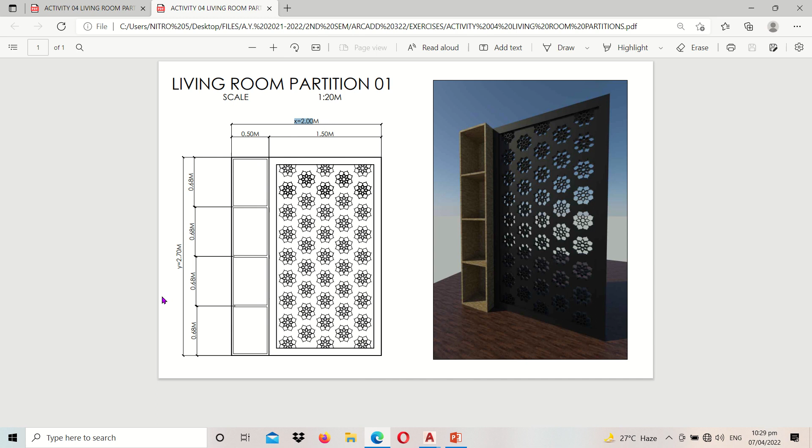So the first one here, we have 2 meters for X, which we will keep uniform for that. We have 2.7 for Y, same, we'll keep it uniform. But when it comes to the overall design, I encourage you to do your own.

There are a lot of wonderful and interesting ideas you can have for this project. But what I did with mine is I took the 0.50 here on the left side and created shelves. And on the right side, I have the metal cutouts that will serve as ornamental so the design won't be that boring. And there is fluidity within the given design.

And then the other one, this one here, I have a little minimalistic as compared to the first one. Same, X is 2, Y is 2.7, so we kept it uniform on both X and Y. But when it comes to design, of course, you don't have to necessarily copy mine. The intention of this one is to provide a living room partition, so I have here an abstract form of a phoenix.

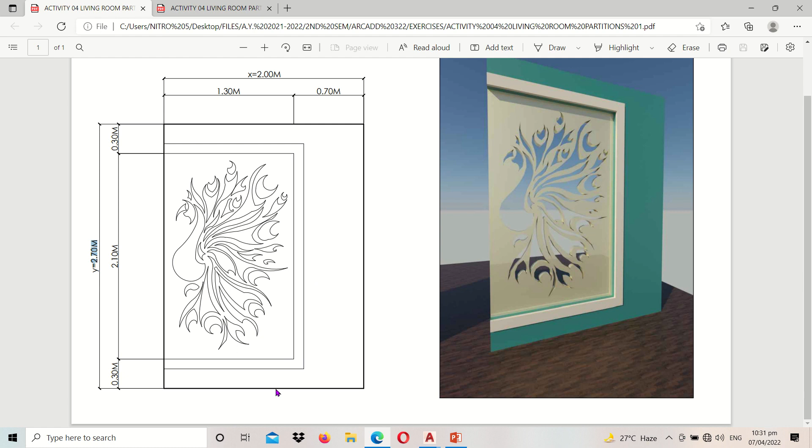And then for this one, I have a dry wall, not CHB wall, just dry wall. Then we're going to cut the phoenix out.

So let's go with cut file. There you go, so these are the shelves I mentioned earlier, and these are also the cutouts. These are actually botanical mandalas, and they have a bit of a Moorish or Islamic feel to them.

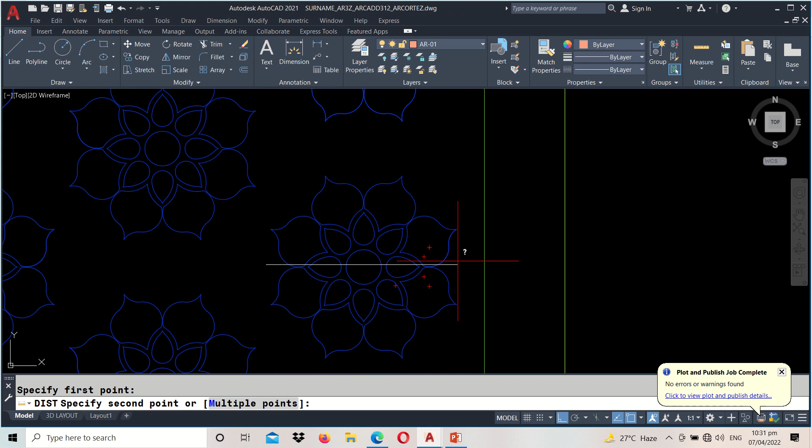Let's try doing this one since some of you forgot how to do this. So I have somehow around 25 centimeters, or that's around 10 inches. So let's create first a circle that will serve as a reference.

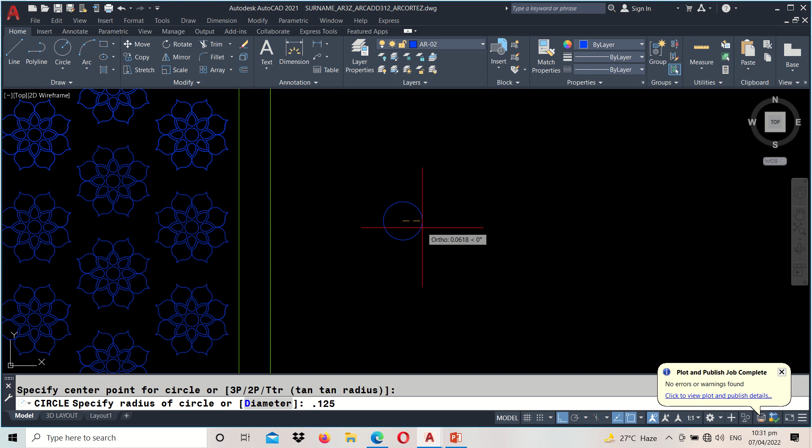There you go, let me just zoom in. I'll enter, just have to pick from the center. Make sure OSNAP is on. You pick the center, you pick a quadrant, then enter, and I have a circle on the center.

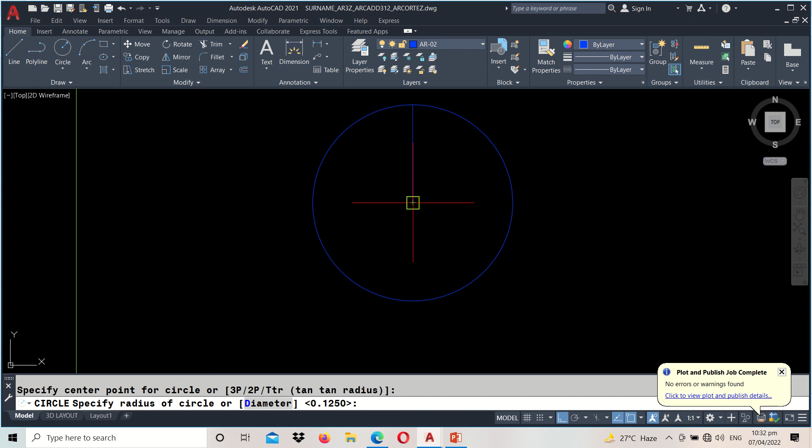So let's try circle, enter, picking from here, click. And I'll just be picking another one to assume the radius. Click, and let's zoom in.

This time I will be using arc, enter. I'll just hover my cursor going here. My ortho or my object snap tracking is on, so I'll just hover somewhere here.

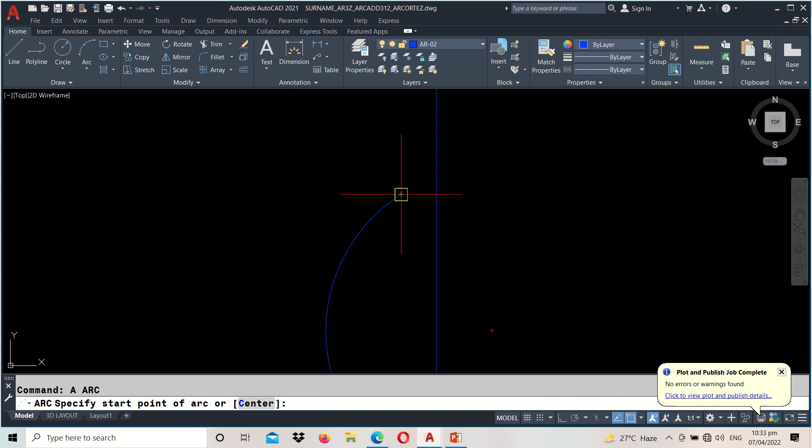And I have to turn off ortho because it's better to modify or make an arc if ortho is off. Anyway, I just pick my point 1, this is point 2 and point 3. And A, enter, just pick 1, 2, and it's okay if it goes beyond.

Because we can always make the necessary modifications that you want with this, so I'm good with that. I'll just have to trim this, and I just have to move this one. I'll be using it later.

Let's do mirror, MI, select 1 and 2, enter. We pick your first mirror line, first point 1, and second point. Click, enter. So that is to create a reverse copy.

Now I have these 4 arc segments, but preferably if you want to make a cutout in 3D, you have to extrude a closed 2D object. This is not a closed 2D object, so the solution for that is boundary.

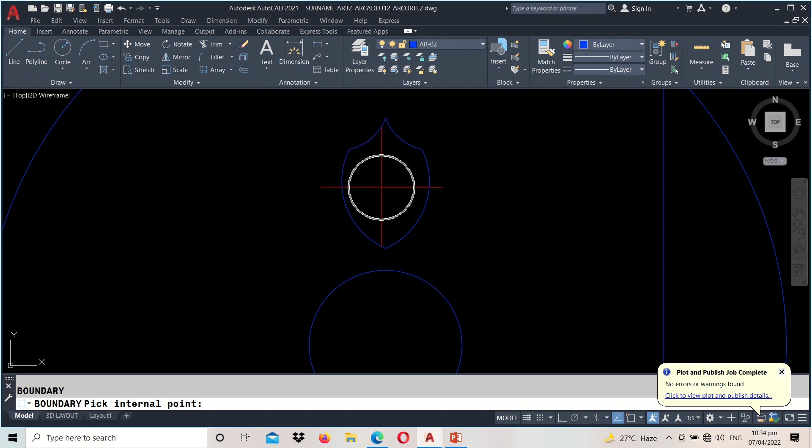Shortcut is BO, then press enter. You click this pick points button here, click, and you click inside. Make sure all of the snaps have snapped together, with no open part of the object. Press enter, there you go, so it's now whole, a single entity.

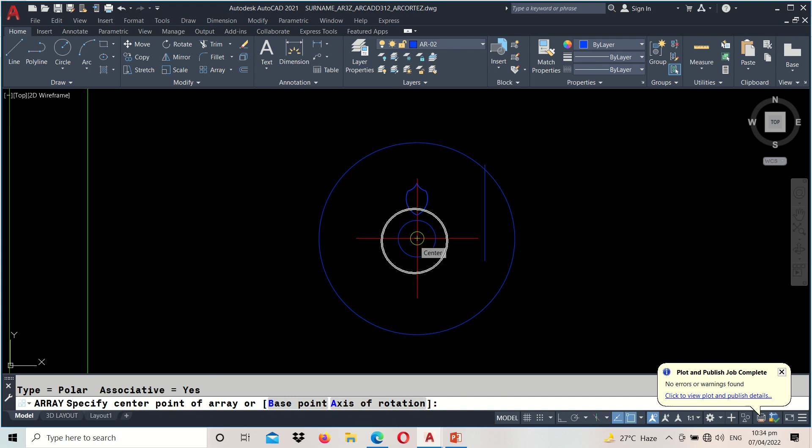And now we're good to array. That's AR enter, select this, enter. Specify array type, that's polar. Click, you click on the center, and there you go. I need 8, so you click this, 8, enter, and click close array.

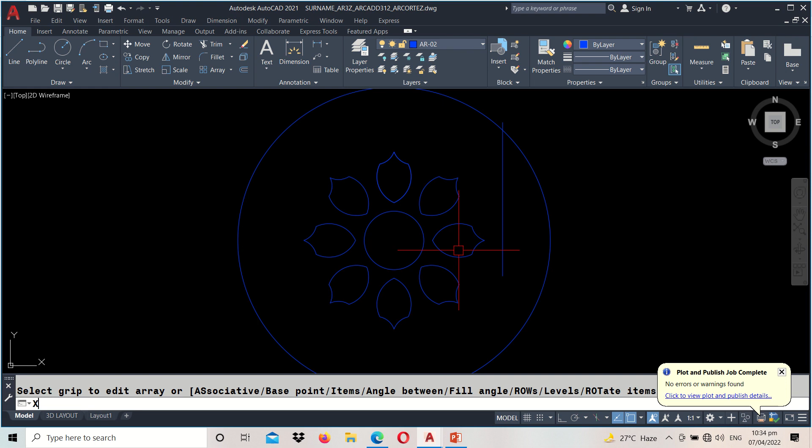Once you're done with this, as you can see, if I select it, since we arrayed it 8 times, it's one whole object, so chances are it might not get extruded. So might as well, we have to explode, X, enter, select object, let's select this, enter. There you go, they're converted into individual closed entity objects. We're good with that.

Now let's move this one back at the center. There you go, let's rotate it, RO, select, enter. I'll be picking from here. I'll just make an assumption, centering it there, I'll be using it for the bigger part of the mandala. So click, make sure ortho is off.

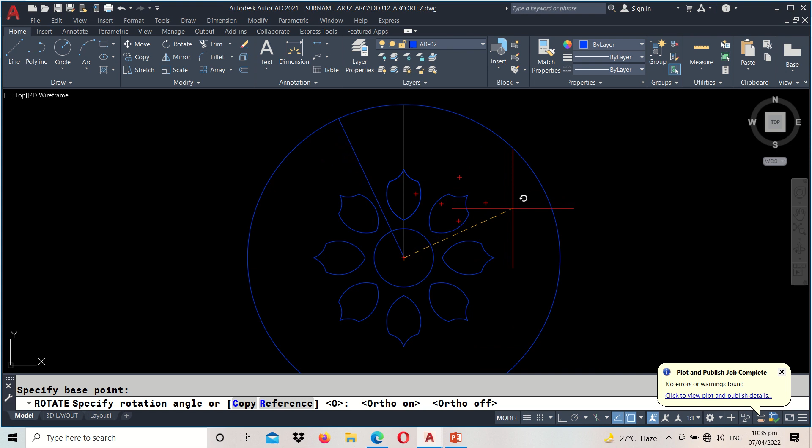Because if ortho is on, you can't rotate it to center properly since it's limited to 90 degrees. So I'll be turning ortho off. And I'm not sure exactly how many degrees it should be, maybe 22 or 23, but I'll just make an assumption like this. So I'm good with that.

Click A, enter, so this is 1, 2, 3. A, enter, 1, 2, and 3. You can make the necessary modification for this. Something like that, probably.

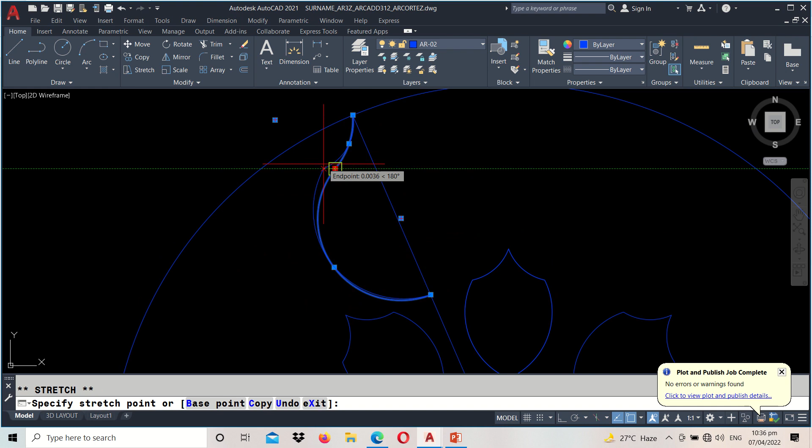Okay, now we're good to mirror. Select... sorry, I just have to make it a little curvier. There you go, so that's the mirror command.

Specify first point, I'll be picking from the endpoint here, going up to the top. Click, enter, select this, enter.

So once that's okay, we can now do a boundary. Enter, click the pick points option, and pick at the center. There you go.

This is it, because you cannot extrude something like this directly. You can extrude it, but the problem is you cannot cut it out from a given volume. That's why I created a single entity closed object.

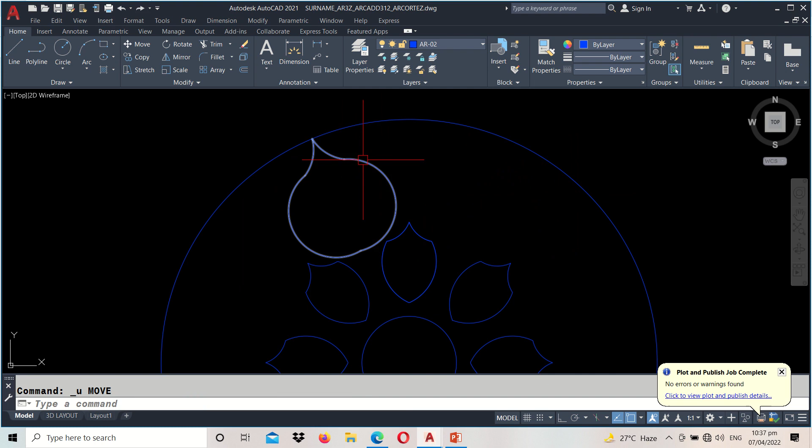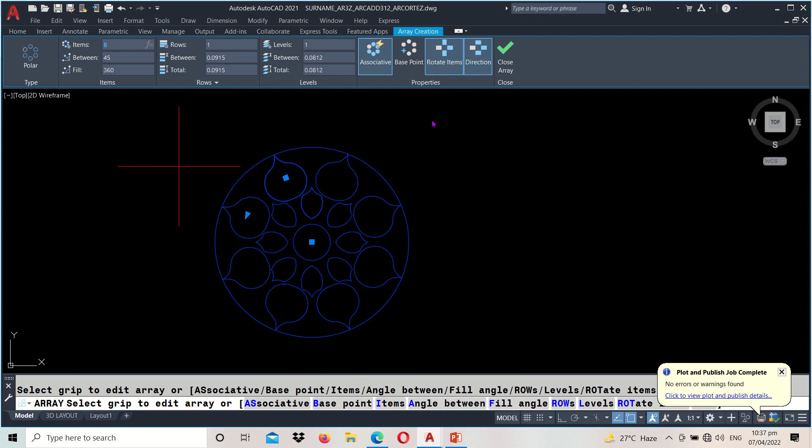Now we're good. That's another array - select objects, enter, array type polar, base point or center point, we just pick from here. Let's set this - it's defaulted to 6, we'll make it 8. Enter. Okay, I'm good with that, and then close array.

We have to explode this one. Select, enter, and now we can delete the circle. So here they are - not exactly identical, but the process is the same.

And I'm not just limiting you to this botanical mandala - there are a lot of cutouts that can possibly be done. This is just an example.

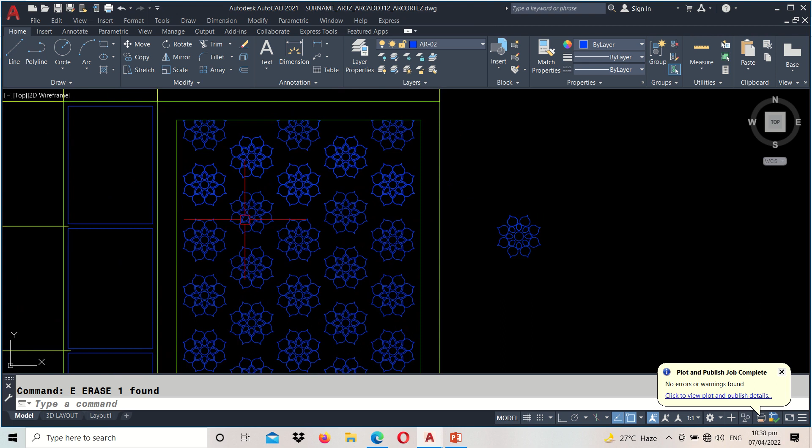Now you can simply copy these things, and you decide the spacing. If you want it bigger, you can. What I did with this one is an alternating pattern. But if you want them aligned horizontally and vertically, creating a grid, you can do that too.

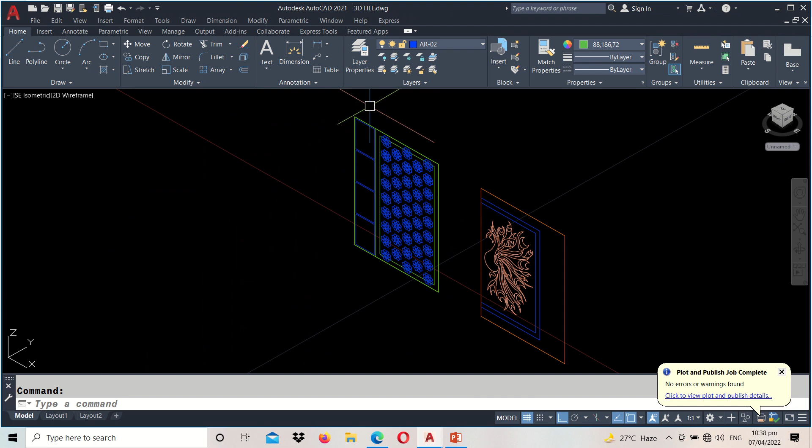Now once we're good with this, let's move on to the 3D. Here we go, we can now extrude and give thickness to the objects. We'll start first with the shelves.

Now, this one isn't a closed shape, so I need something complete. I'll be typing 3P - point 1, 2, 3, 4, and 5, or just simply click close.

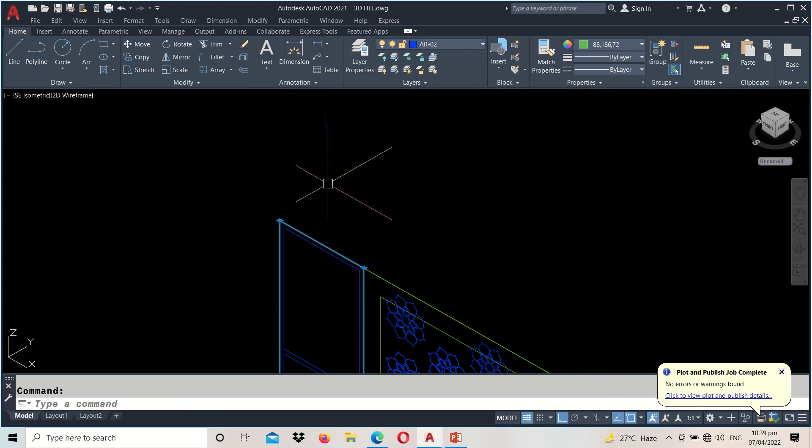So that the last point and the first point meet. Okay, we'll have that object. We're good to extrude - EXT, enter.

Let's type 0.4 - you can make it thinner, or you can make it a bit thicker. Now I already have this box.

And let's extrude this one too - this 4. Okay, I'm good with that. Press enter.

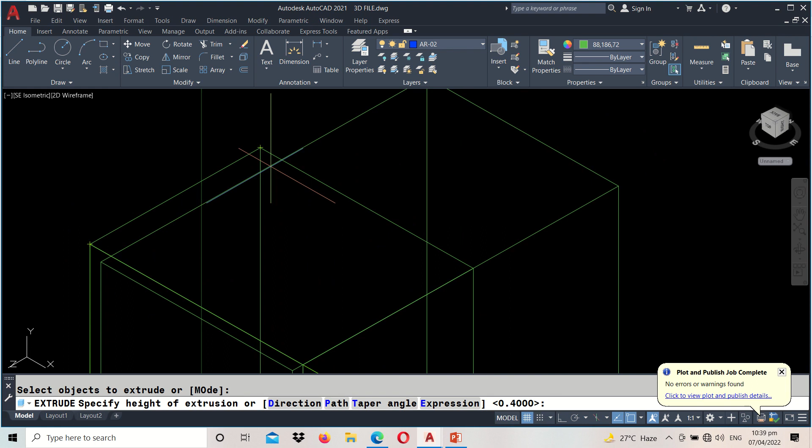I could do 0.4, but I have a backboard here at the back which is 1 inch. So from the 0.4 thickness earlier, I'll subtract 1 inch, which is equivalent to 0.375. Enter.

It goes to the front. Let's move - 1, 2, 3, and 4, enter. I'll just be picking from here and here. So that's the backboard - let's type negative V, enter, T for top. Okay, this is the backboard I was talking about.

That's why we set these to 0.375, and this one to 0.4, because I have a 1 inch thick backboard for my shelves. Hope you get it.

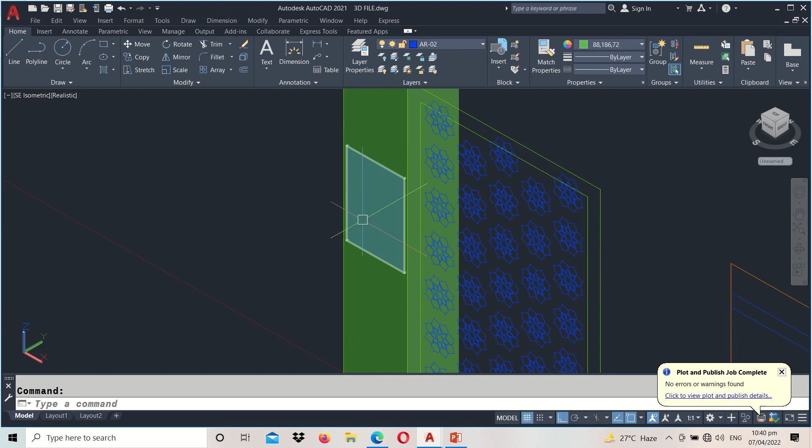Back to the southeast view - the volumes are good. So we need to subtract these four. If we look at it realistically, we shouldn't see them, because they interfere - meaning there are volumes within a volume.

So what we're going to do is go back to 2D and use SU for subtract. Select object - what object will be subtracted from? We have the bigger box.

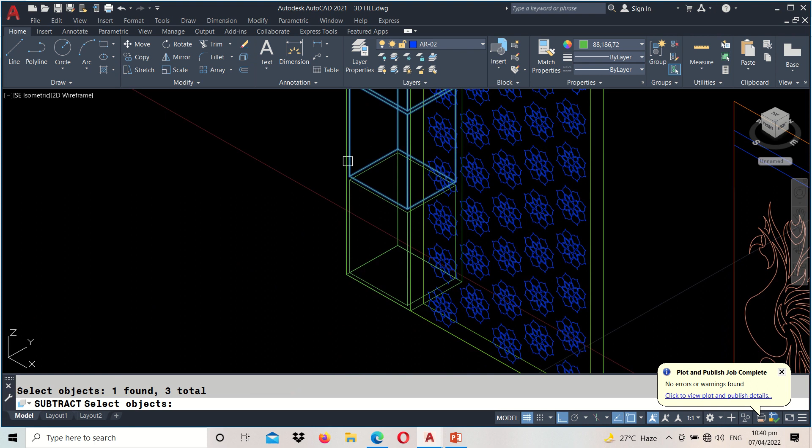Enter, select objects - what object will be subtracted? Let's select these smaller boxes here that will serve as the volume to be taken out. Once they're all selected, just press enter. Let's check - realistic view. There you go, it has a hole now. 3DO.

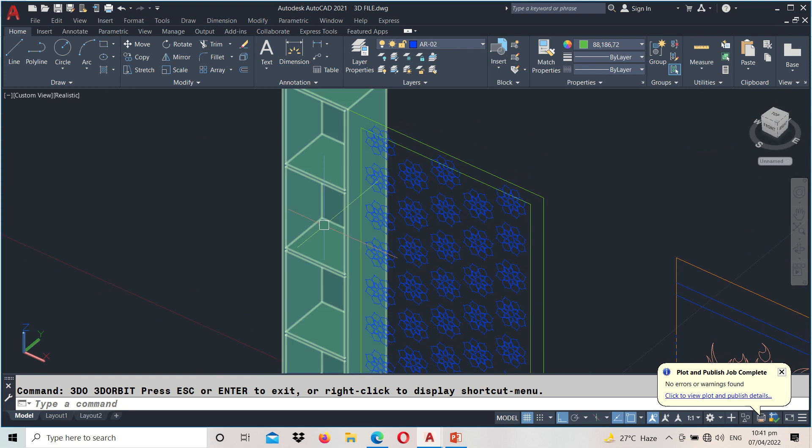Here we are - I'll be using a 2x4 inch tubular frame for this. Let me just change my color - fuchsia, just orange. Okay, 3P.

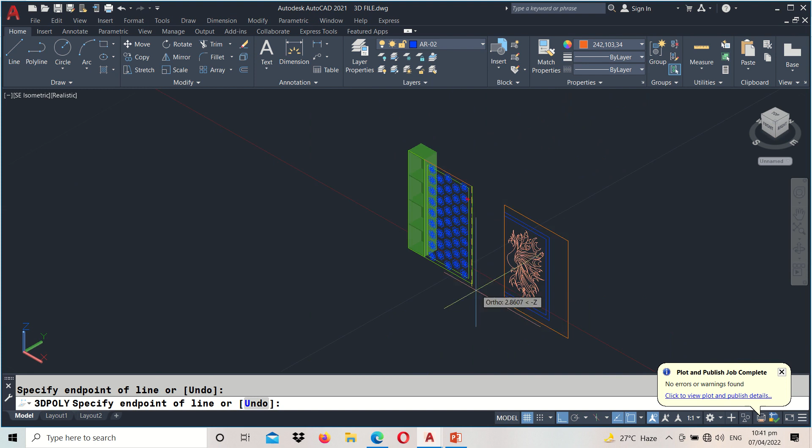Enter, picking 1, 2, 3, 4, and C to close, so that the first and last points meet. Let me delete this now.

The objects colored green, or those I mentioned that don't contribute - because there are times when the object you want to select doesn't get selected because of those unnecessary objects. Anyway, I already have the path.

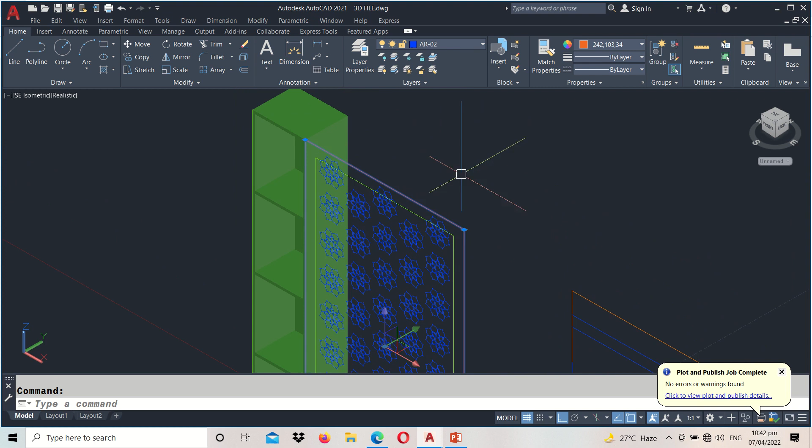That's the 3P from earlier. Next, I will do the profile for our metal frame - so that's at 0.1, 0.05. Enter. So here it is.

What I'm going to do is move that - I'm moving this one here from the midpoint, to the midpoint here. Why did you move it? Because it's more practical for the profile and the path to be the same objects, so that the operation becomes possible.

May chances na mag-error or maka-cancel yung sweep command kasi walang common object snap or walang common midpoint or endpoint, so I'd better suggest you that. Okay, anyway, we're good to sweep.

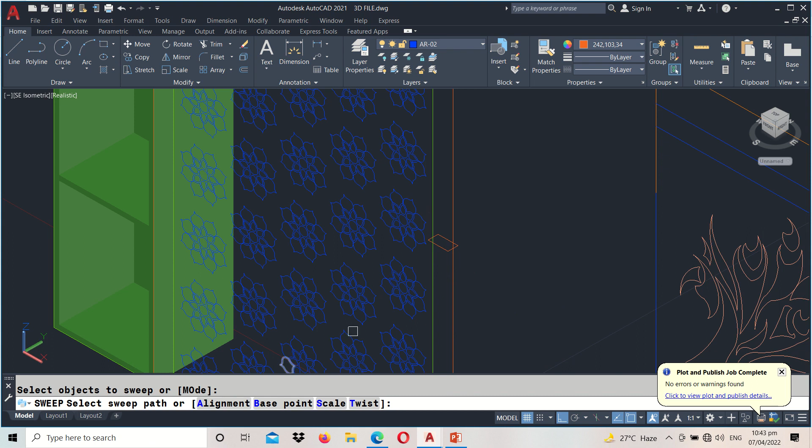That's SWEEP, enter. Select object or the profile. Ito po yun, select, then press enter. Select sweep path, ito po yung path natin earlier. Click, there you go. That's our path. We can move this one sa gitna.

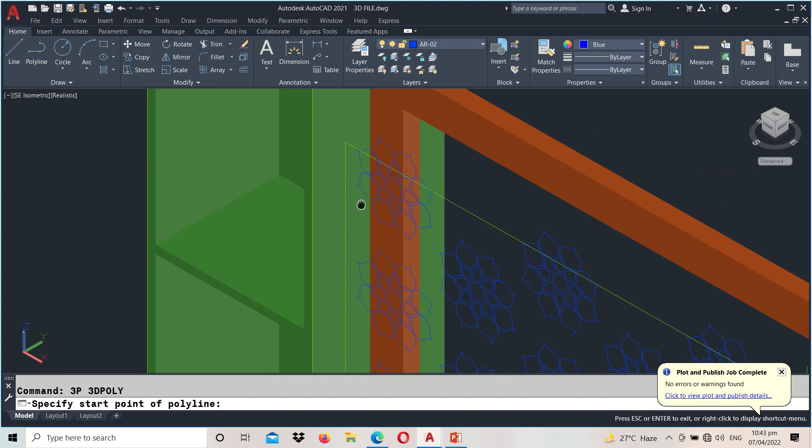You can also change the color, something blue. Okay, that's another 3P. 1, 2, 3, 4, and C to close. Ito yung metal sheet natin. Burahin ko lang itong mga ibang objects. Okay, so ito na siya.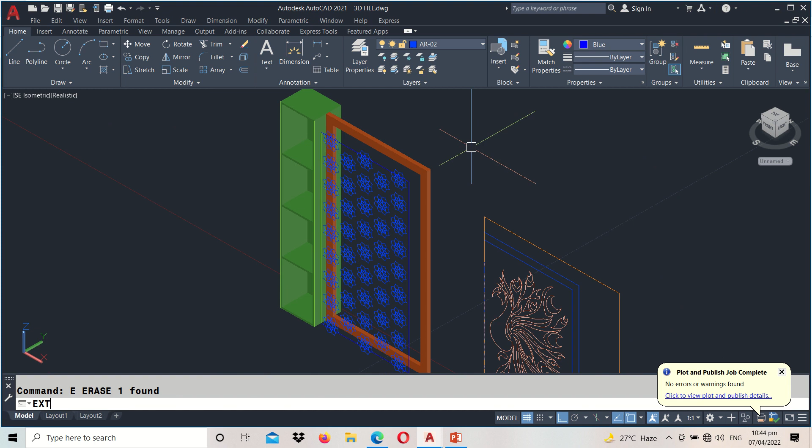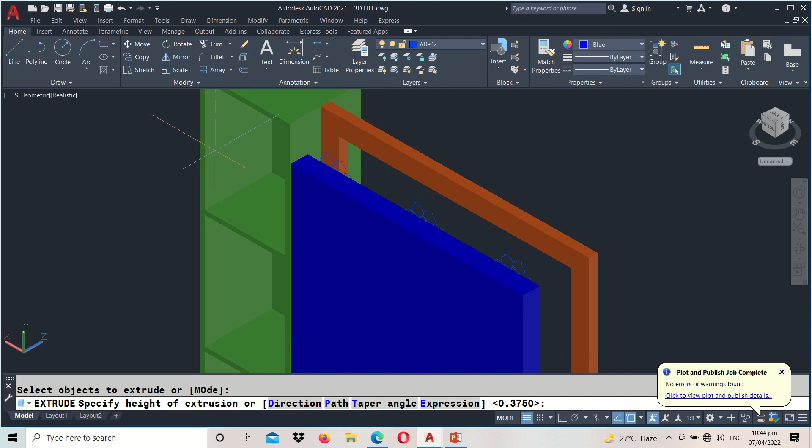Ulitin ko, you're not limited to this style. You can have Arabic patterns, Moorish patterns, patterns from local fabrics in the Philippines. These are just examples.

And we're good, all of the things are selected, so you just have to press enter. We'll be using 1/4 inch thick for that metal plate, so that is 0.00625, enter.

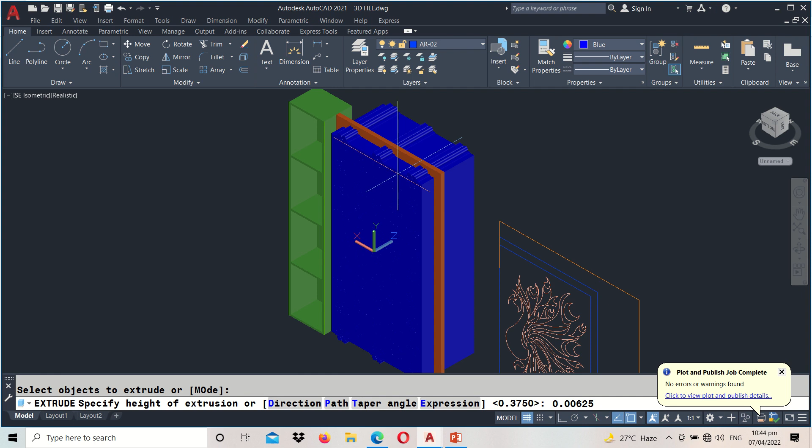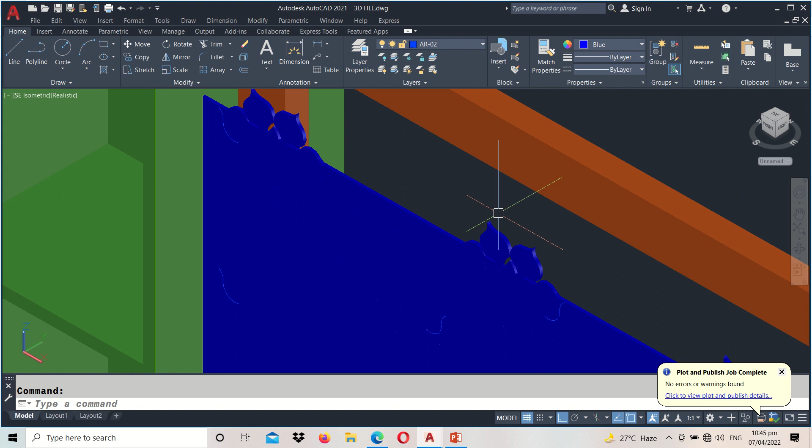Let's wait a little. Very good, so Control S to quick save. Let's zoom in, so ayan po. Kasi you can only subtract a volume within a volume if may interference or pumasok yung volume sa isang volume. Kasi kung hindi siya pumasok or hindi siya nag-interfere, there will be no possible subtract operation. Okay, anyway that's SU, enter.

Select object, anong object yung babawasan mo? Ito po yun, yung plate natin or sheet natin, then press enter. You are prompted to select objects again, anong object yung ibabawas natin? So we pick from here down here, until everything that should be subtracted is selected. Pwede nyo ulit-ulitin, minsan kasi meron mga naiiwan sa selection. Okay, anyway we're good, just have to press enter.

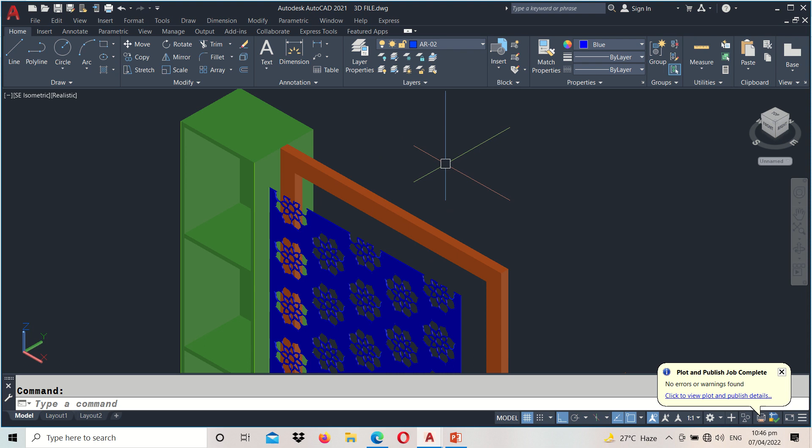And this is now our magnificent metal sheet cutouts. Very nice, very pretty, and very feminine. Kasi there are some interiors that are too rigid, so adding curves will make some fluid design, therefore reducing the rigidity. But I prefer, I don't know, linears, minimalist.

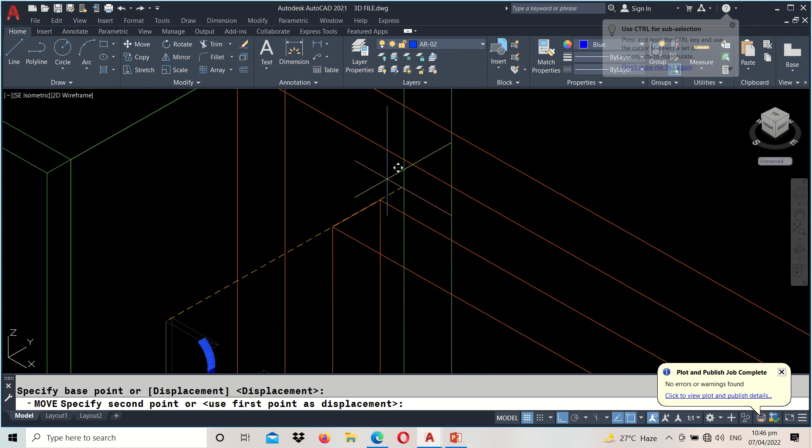Anyway, going to type VS, enter. That's also equivalent to selecting your visual style here, so that's the command line option. Anyway, I'll be moving this one here papunta dito. So M, select this, enter, click on the midpoint to the midpoint. Click, there you go, so meron kayong makikita.

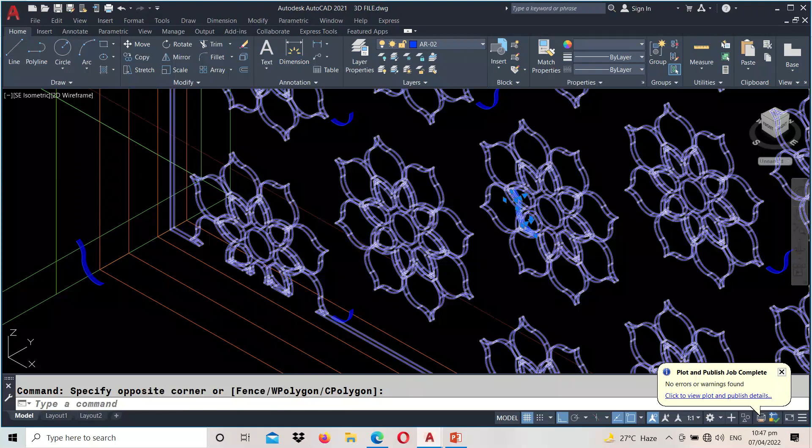Yan po yung mga arcs na hindi nabura ni ma'am, hindi rin po sila nasama dun sa boundary. So that will happen if you did not convert things to boundary. You cannot have this surface object sila, hindi sila solid. Pag yung isang closed area ginawan mo ng boundary and extrude mo, solid object siya. These are not solid objects, they are just given a height out of 2D objects, such as, for example, yan nga, yung arc.

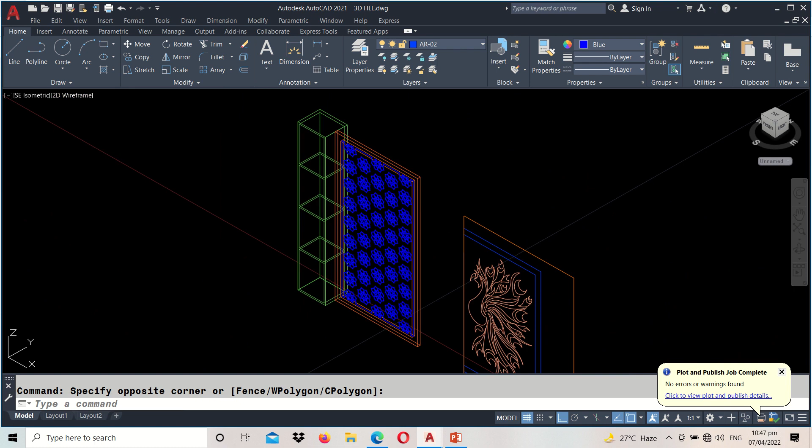So I'm just deleting these things na walang ambag sa design natin. Okay, very good, malinis na siya. So let's go to realistic. Of course, you have to do quick save - rule of thumb, do a quick save at least every 5 commands.

Anyway, let's launch the AutoCAD materials browser. That's MAT, enter. Selecting this one, hanapin natin. Pwede kayong maghanap dito, but all of the materials that you have previously used, available din po sila dito. Okay, so boards.

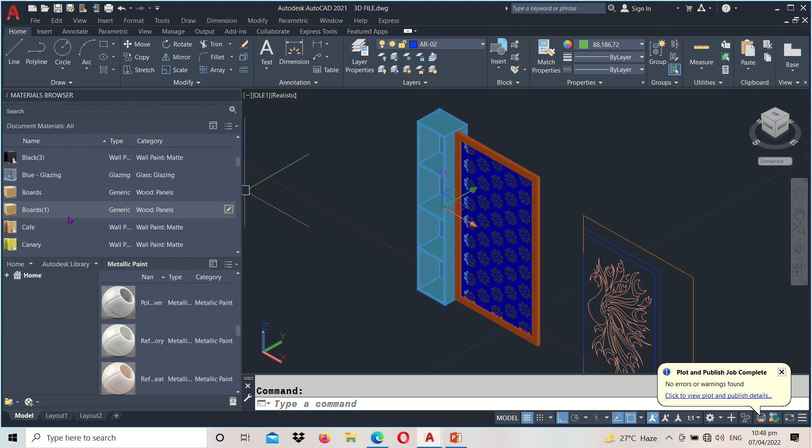Okay na ba ako doon? Parang hindi ko feel, this one probably. No, let's see. Default wood, I'm good with that. Select this, I know I have this flaked satin. Okay, even this one, select and flaked satin. Okay, so close this and we're good.

Okay, very pretty, okay I'll say one to that. Next one will be the...

Phoenix. I was really looking for a good cutout, a very interesting design for the cutout, but I don't know what to search. But then again, this has been on my feed, an abstract Phoenix, so credit po doon sa may-ari, copyright. But if you want, you can also make a sketch of your own and then pictures you can use them.

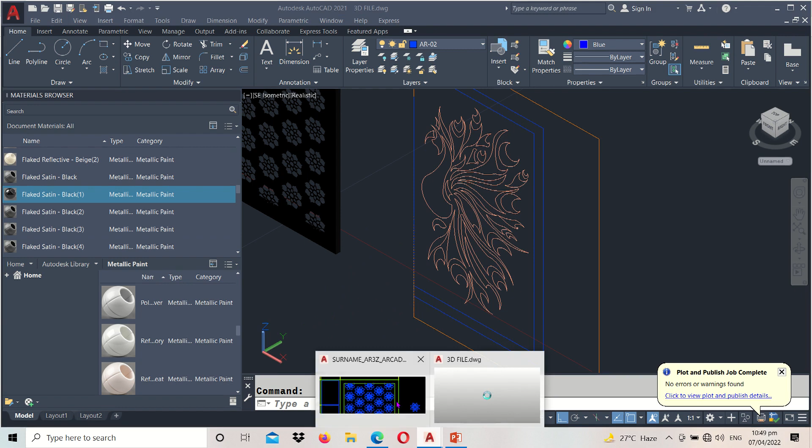Now, how to do that? Of course there's an easy way. You might think that's kind of hard, but we have here in 2D. Burahin ko lang to, yan. So how to do that in 2D?

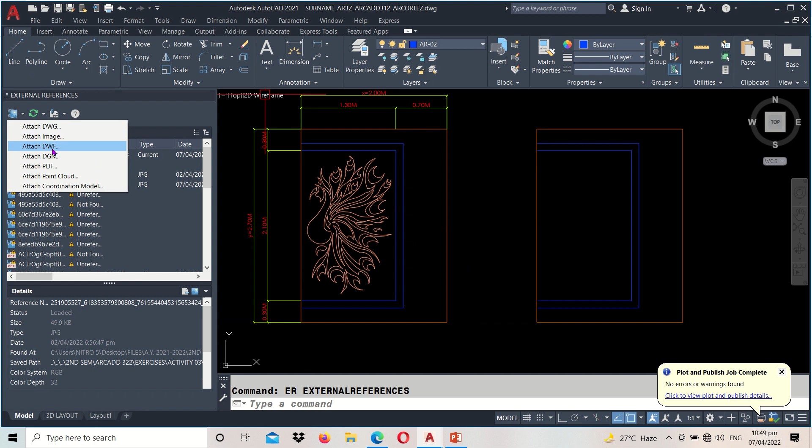Dali lang, okay let's close this. Let's type ER for external reference. I'll be attaching a JPEG file. You have this arrow here, you have several options on which file type that you can attach within an AutoCAD file, but this time we're going to use the attach image option.

Hanapin natin yung file or folder kung saan nakasave si Phoenix. Okay, where is it? Nandito siya. It's the same folder kung saan nakasave yung CAD file ko, which is the host file.

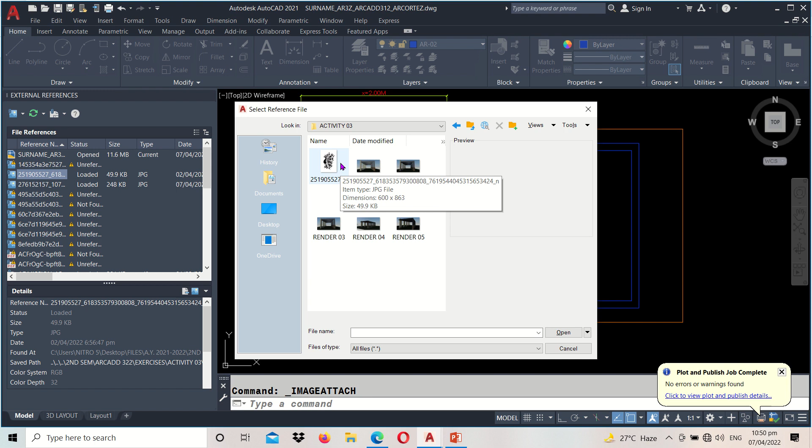Make sure they are of the same folder na nakasave. Anyway, ito siya. Select, click open, click OK, and then we just be picking from here. You can also do screenshots. Okay, so there you go. You're selecting this one, right click, and meron siyang draw order.

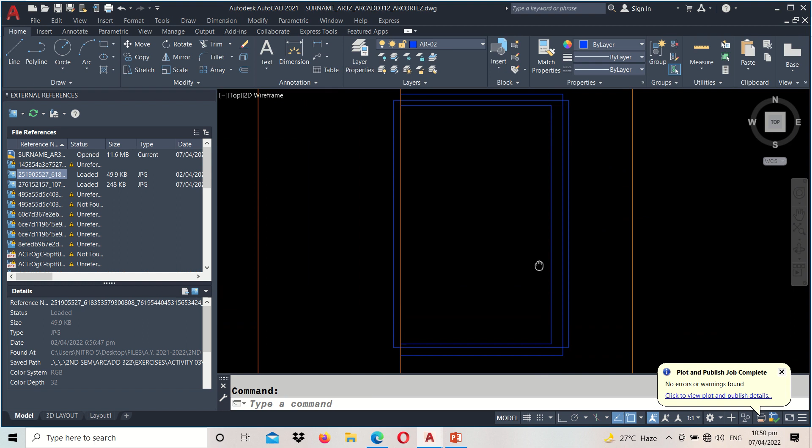I'll just be sending it to back para nakikita ko hanggang saan lang siya nandun. Okay, you can always select it anytime. You can click the grip and make it a little larger. Yan, tinatantya ko siya. Ayoko kasi siya lumagpas. There you go, okay, perfect.

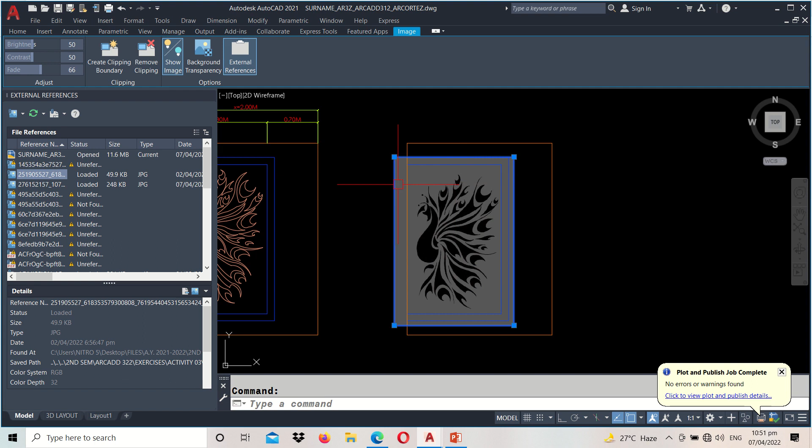Now I can select this one. While the image is selected, you have the option to increase the brightness, the contrast, fade. Okay, so dito tayo sa fade. There you go, and escape. Okay, pag in-escape mo, mawawala na siya. You just have to select it back again, and you can have it.

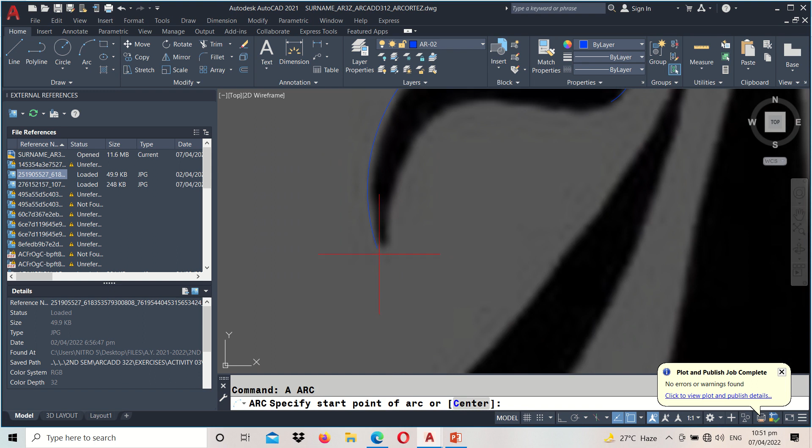Anyway, we're good, so let's start with it. Sort of parang iti-trace natin siya, so it's a digital pambabakat. Okay, A enter, I'll be picking 1, 2, and 3. A enter, 1, 2, and 3. A enter, make sure you snap on the endpoint. That's 1, 2, and 3.

So ayan siya, make sure na walang part na nag-intersect. Make sure everything is closed or snap on each endpoint. Okay, kasi lalagyan natin siya ng boundary. Kasi if hindi siya boundary, hindi natin siya ma-extrude na maayos. Hindi natin siya masasubtract, walang cutout.

Okay, so A enter, this is 1, 2, 3. A enter, 1, 2, and 3. A enter, 1, 2, 3. And A enter, 1, 2, and 3. So ayan siya, you can always press your middle mouse para makikita nyo kung ano yung nakikreate nyo.

I actually have done so much of this. Usually mga manga characters yung tinitrace ko. It's very relaxing. Anyway, let's continue.

A enter, 1, 2, 3. A enter, 1, 2, and 3. A enter, 1, 2, and 3. A enter, 1, 2, 3. There you go, I hope you get the concept until such time na matapos yung Phoenix natin.

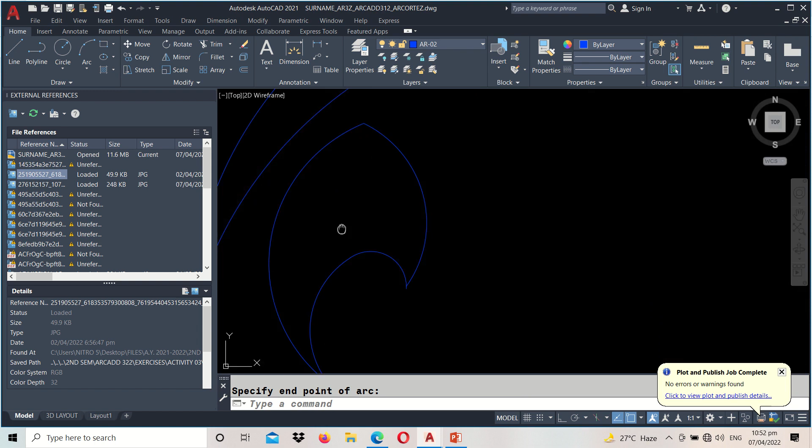Pag na-trace nyo na lahat, please do not copy it exactly. Okay, so for example nakikita nyo to, hindi ko naman exactly sinunod yung pagkaka-art niya, but you can adjust this. Okay, there you go, pwede naman. But if it's giving you hard time, you opt for the one that is less complicated.

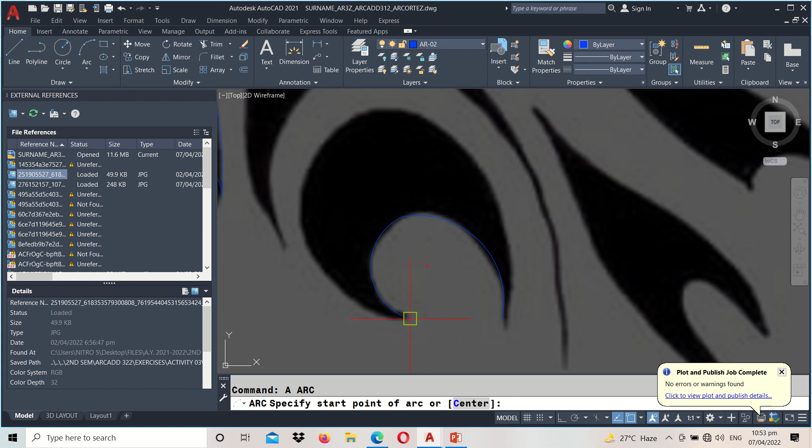Huwag niyong pahirapan, just want you to get the concept that it's better to have your models done first in 2D, or actually sketch nyo muna if you have some ideas. Anyway, andyan na sila, so what's the next thing to do?

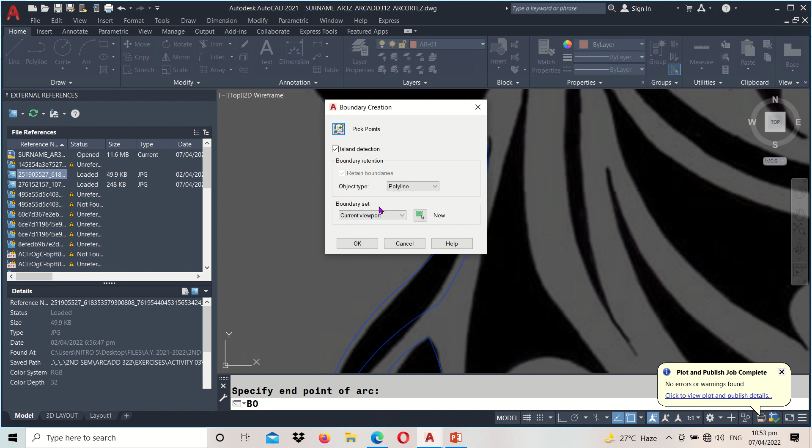Say for example natapos na natin yung pagtitrace or pambabakat, so let's switch to other layer para yung kulay niya makita natin. BO for boundary, pick points, I'll click here, enter, enter to repeat your previous command which is boundary. You click pick points again, click inside, enter, enter to repeat. Pick points, click, enter, and enter.

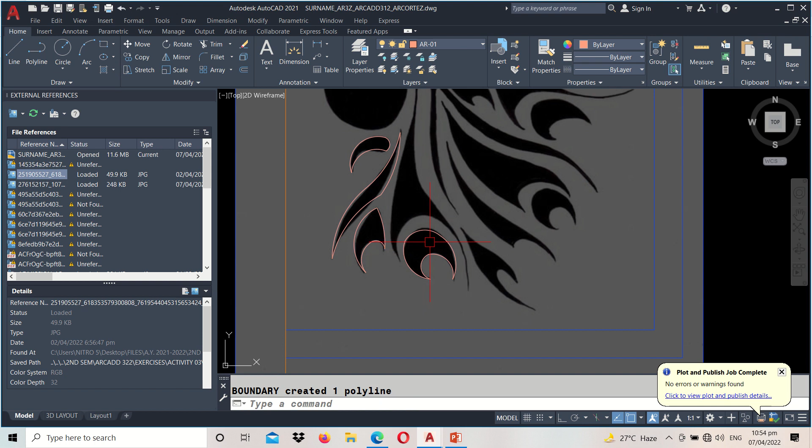Pick points, and click inside, enter. The boundary command will not be possible if meron parts nung kine-create mong area na open. Okay, minsan kasi hindi natin napansin, meron na pala tayong hindi nakiklik na maayos. Okay, so once we're good, pwede nyo nang burahin to.

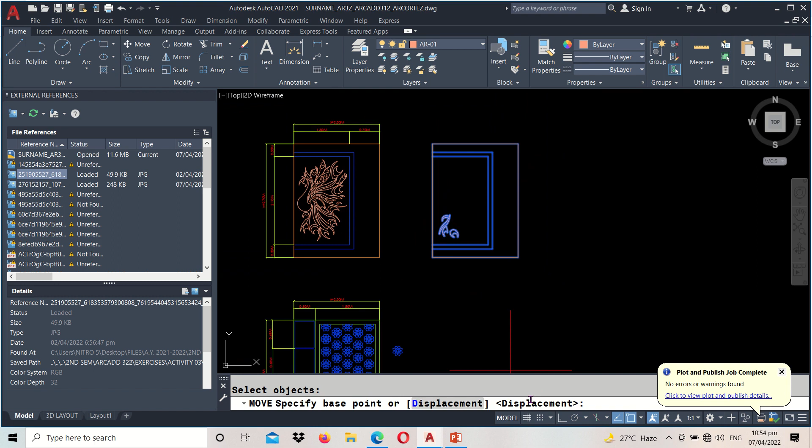And you can actually move things, but you have to select dito sa part na to, one by one. Bakit? Para pag nag-move kayo, yung mga ginamit nyo lang arc segments, hindi na sila masama. Kasi pag nag-extrude pa tayo, pwede makadagdag pa sa nililinis natin. Anyway, parang cooking show lang yan.

This is now the finished product. Okay, everything is, yan nga, they are of closed boundary areas. Okay, so let's quick save muna. Let's go with your 3D file. This is now our 3D file.

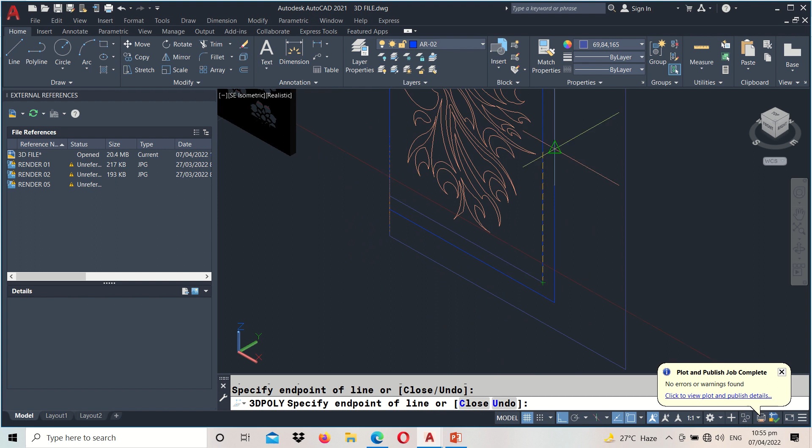So let's unahin na muna natin itong pinaka-drywall natin. Kung drywall siya, medyo manipis lang. Okay, anyway I did 3P pala, sorry, 3P, 1, 2, 3, 4, 5, 6, 7, 8, and C to close. Ito siya, asan? Yun. So I have to erase the other objects kasi iba yung nasa-select. Anyway, I have this one.

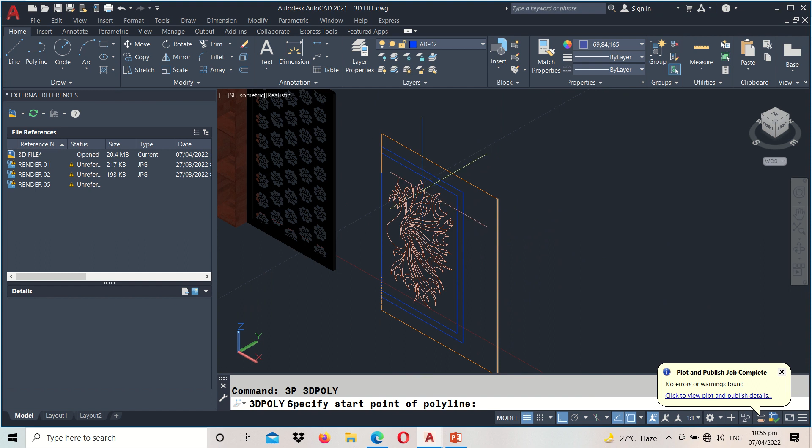Sorry, I better be moving it pakanan na lang. I'll delete this, sorry. Dito natin 3P, 1, 2, 3, 4, 5, 6, 7, 8, and C to close. Let's erase that, M enter. Lagay ko na lang siya dito. Okay, tapos we can extrude that one probably at 0.075 if it's a drywall.

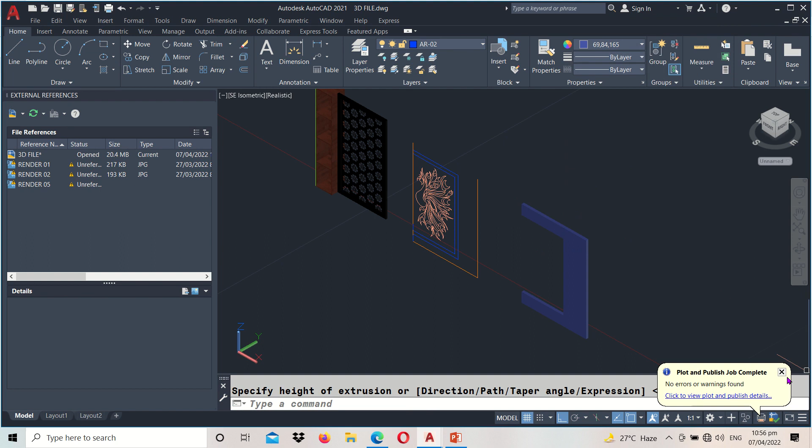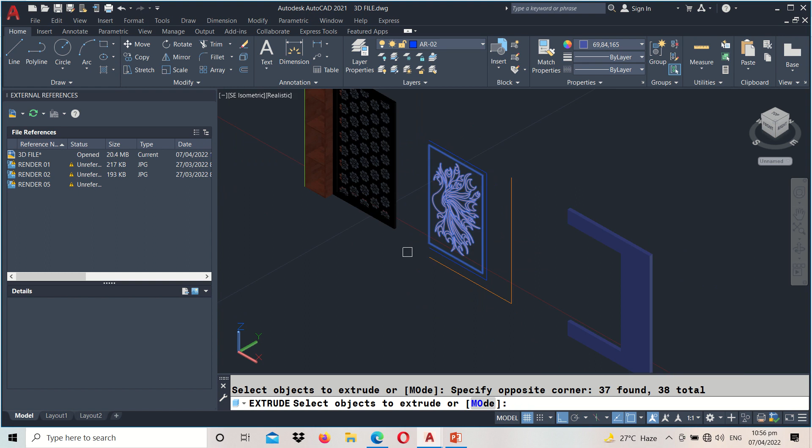Okay, so pwede na yun, manipis lang naman. And then next will be the metal sheet. I'll erase that one, this one also. And type 3P, 1, 2, 3, 4, and C to close. Okay, so we're going to extrude this and this one. So EXT enter, select this, and select your boundary objects. Okay, so enter, and that's 0.0625 or 63.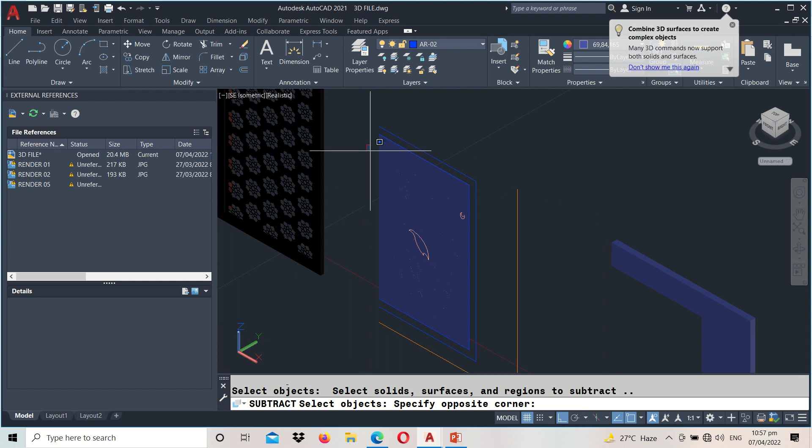Let's select this one, enter. We'll pick from here so we can select our extruded boundaries, then press enter. Okay, I wonder why this isn't working.

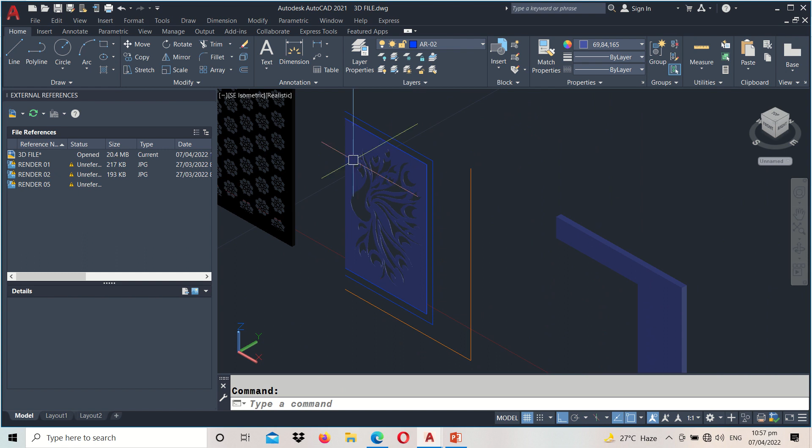But anyway, I think I'll just leave them that way. I'm okay with that, the result still looks good. So I'll be moving this one. Or sorry, let's do that later. Let's do the molding first.

So, 3P again. This is 1, 2, 3, and 4. Okay, so here it is. And then type 3P again. 1, 2, this is 0.025, thin, just an inch. 0.1, enter, and stop here.

And then EXT, enter, select this, enter. It can be swept or extruded along a path. Okay, path, select this. There, it's not selected. Let's try that one. There, okay.

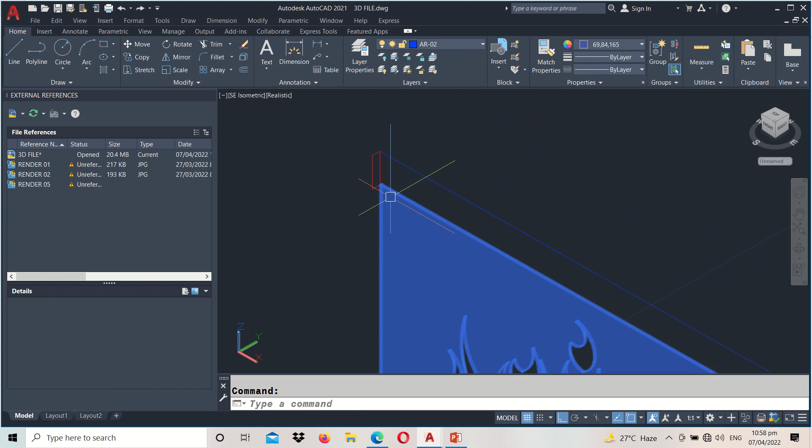But let's handle this now. Okay, I have to move this one. Let's go to 2D wireframe. M, select this, enter. I'll click on the midpoint, and to the midpoint. There. Okay, then just the corners or the molding. EXT, enter. I have to move that because it's not selected.

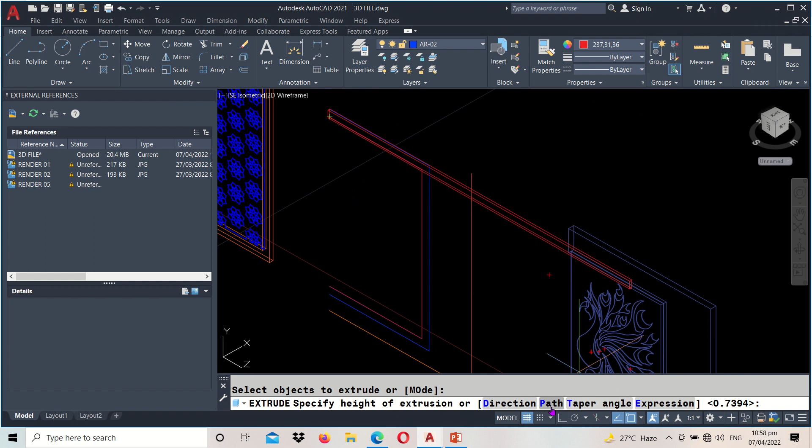Okay, I hope you get the idea. EXT, select, enter. Let's use path. Though this can also be done with sweep, but I'm giving you the other options. Okay, so select. There you go.

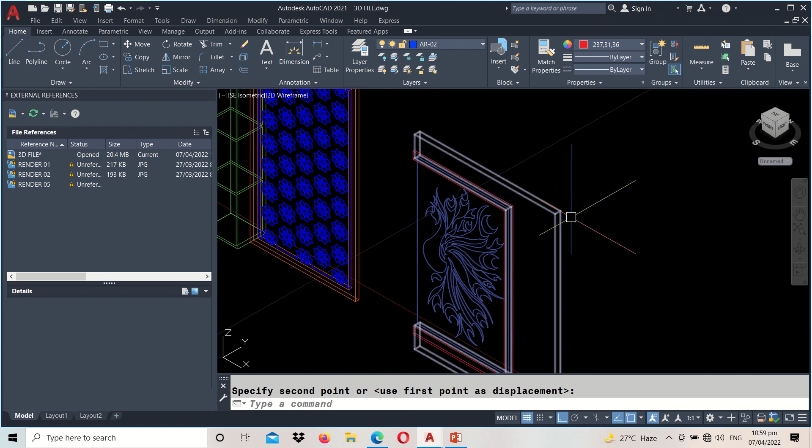I'll just delete this, enter, and probably just move this over there. M, select, enter. I'll pick this point here, and place it there. Click. There you go. VS, R.

I'll select this one and close the XREF, then launch my materials. Mat, enter. Select this part and I can just simply recycle from my used swatches or materials. Let's say turquoise, okay, or anything that's blue-green since it's summer.

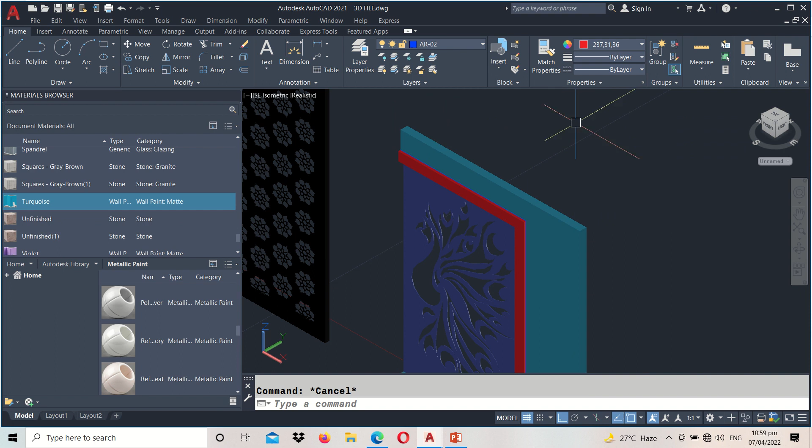Select this one, just look for that, width. So you can have your own color scheme. Okay, I'm not limiting you to this.

Select this part, home, Autodesk library, metallic paint. Okay, what do you prefer? So maybe I'll try selecting this one. There, okay, close this one.

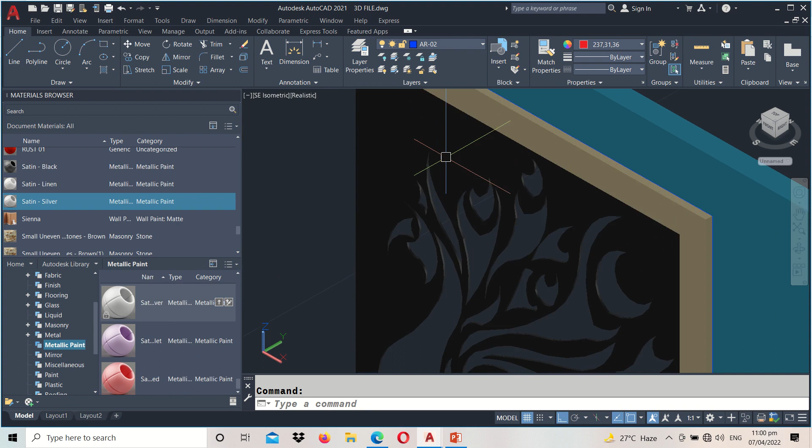And that's Control S. Make sure your ortho is on. We're going to copy this, CO. Select, enter. We can select the camera somewhere here. Click, enter, select, right click.

Don't right click here. Okay, once you select it, you right click here, because it might disappear. So, set camera view. There you go. I think my background is turned off.

Background, enter. Okay, there it is. So I'll be selecting sun and sky. Under sun and sky, there, it has an on option. You can actually turn it off, yes, there's on and off, including the status of the sun.

Intensity, you can always adjust this. You can make it a little dimmer or brighter. You could set it to 20, it's possible. Color if you want it red, but I think it's not editable.

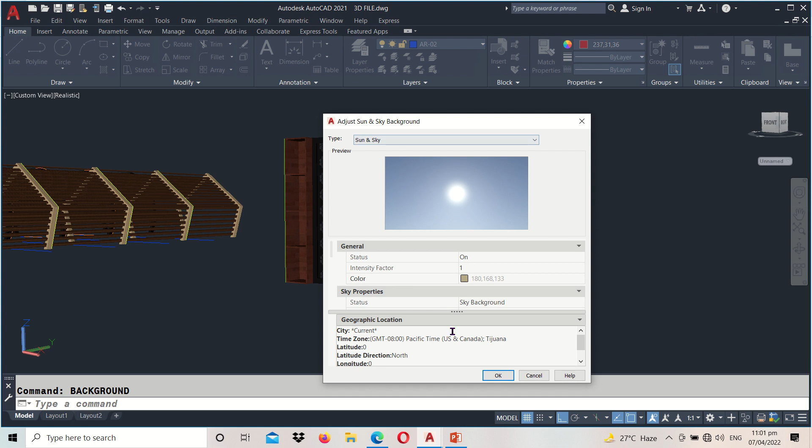Okay, properties, there's more there, but I don't usually alter this. So that's it for sun and sky. Okay, I just have to click OK.

Then RPREF for the render settings. Okay, currently I have the setting on high, but you can always check what is compatible with your unit. Okay, if it can handle overnight or lunch quality, that's even better.

But please, not to the point that it damages your laptops, because computers, desktops, laptops, they are very useful, so make sure you don't exhaust them. Okay, and then for the render size, usually when we render, it comes out landscape.

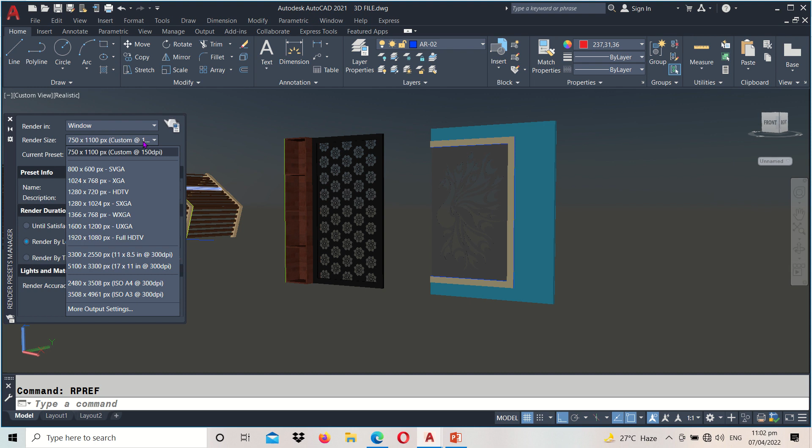But since these are vertical, our partition models are vertical, I actually used this option. More output settings, okay, I changed it. The width is 750, the height is 1100. You can always modify this to a higher image size, but it will take you more time.

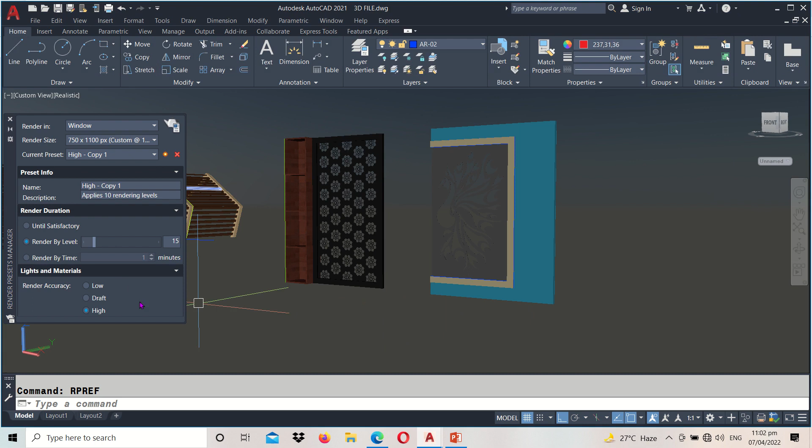Okay, so as long as you show it properly, I'm good with that. Anyway, I'll just save this one and go straight to render. Okay, so I will no longer be showing that part. I'll just have to quick save.

For the finished product, or the one that you will be submitting, here it is. Okay, so you are required to submit a minimum of 2 designs. If you wish to have 3, 4, or 5, I really encourage you.

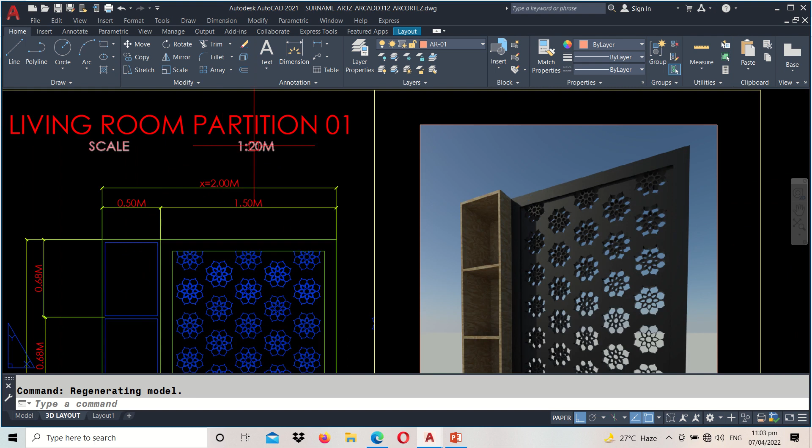Okay, and of course I will be giving extra credits. Okay, so for the left part, I used 1:20, this is the long bond, then I just xref'd this in. Okay, I also uploaded this, living room partitions, more designs. If you were my student in ARCADD 312, you can recycle our old activities from that subject. Okay, and anyway, that's it.